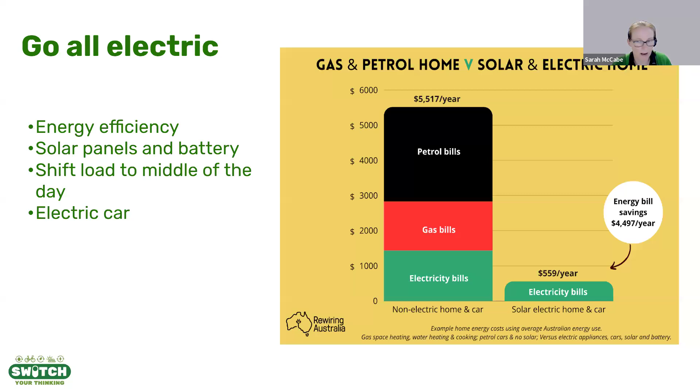Going all electric - Rewiring Australia is a fantastic organisation that has crunched the numbers on how much going all electric will save people and what that means for our carbon emissions. You can see on that slide it's a huge difference, achieved by making 6 key decisions: solar, a battery, heat pump hot water, induction cooktops, and electric vehicles, along with making your house as energy efficient as possible. Rewiring Australia is a great website to look at if you'd like to find out more.

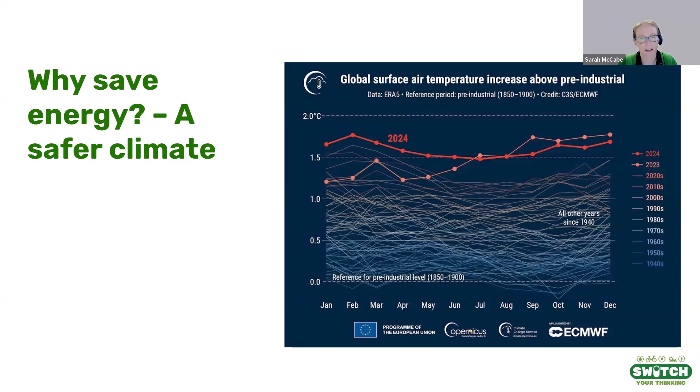And finally, the other reason for looking at energy efficiency is a safer climate. This graph shows how global average temperature has been rising for some time. We've had a big jump in the last couple of years, which shows how urgently we need to continue to act on this and do everything we can.

So that brings me to something very important to know when you're looking at making your house more energy efficient: how is energy measured?

I think we'll start with a watt - everyone knows a watt because it's on your light bulb box. You can see my little light bulb there, it's a 4-watt light bulb. A watt is how much power your appliance is using at any moment in time, and kilo means 1,000, so a kilowatt is 1,000 watts. You can compare my 4-watt light bulb with my electric oil-filled column heater - that's the nameplate on it, and you can see it uses up to 2,400 watts, or 2.4 kilowatts.

A kilowatt hour is how much energy your appliance is using over time. So if your heater is drawing 2.4 kilowatts for 1 hour, it will have used 2.4 kilowatt hours. If it was drawing 2.4 kilowatts for half an hour, it will have used 1.2 kilowatt hours. A kilowatt hour is the unit in your power bill.

These two things are confused all the time, but they measure quite different things, and it's important for you to know as we go through the presentation, because I'll be talking about those two things a bit. So, the first step to addressing your energy efficiency is to get out your power bill.

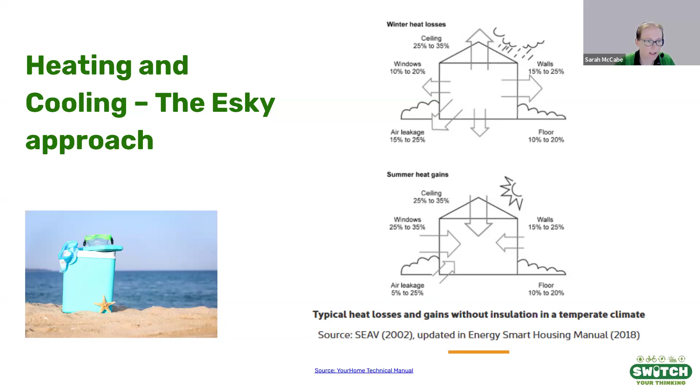So the big one is your ceiling, and that's why people talk about roof insulation so much. If you don't have ceiling insulation, I recommend you get it. The minimum at the moment depends a bit on what climate zone you're in and a few other things, but it's around 4.1. The R value is basically a measure of how insulating the insulation is, and that's the minimum for new builds now. If you do have insulation already, you might want to check it's okay.

A really great safe way of checking is to use your thermal camera, which is in your energy audit kit. There are lots of stories, particularly in recently built houses, where builders haven't installed insulation like they're legally required to, or the batts have just been thrown up there still in their packets, or more commonly, it's just been installed very badly. Or the insulation has been there a long time and it's thinned, or a tradie has shifted it and not put it back. There's all sorts of stuff that might mean your insulation isn't working properly, and those are the things you'll pick up quickly with a thermal camera.

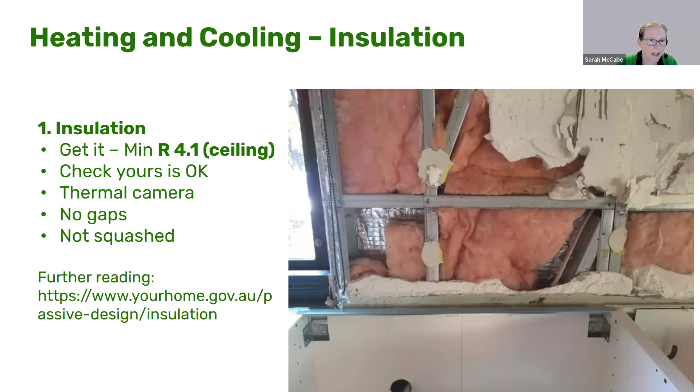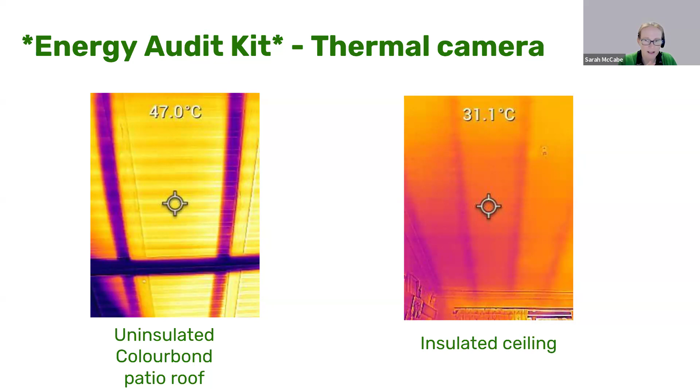In terms of my insulated ceiling, that looks pretty good, better than my walls at least. I can't see any gaps or anything like that. Normally if there was an issue, it'd look all kind of chunky.

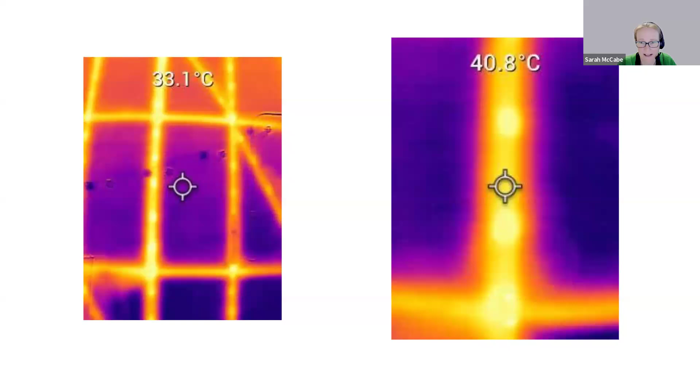All right, so the next thing was the windows. You all kind of intuitively know the hot windows in your house, they're usually on the east or west side, and those are the ones you really need to work on. The best thing is if you can stop the sun hitting your windows in the first place with shading, which might look something like this.

There's shutters and there's all sorts of things that you can use. Basically, you just need to stop that light hitting the window.

We inherited this very large roll of good quality block-out shade cloth, and when I saw the price new, I was like, okay, green shade cloth is fine.

But you can also use like a vine or plant a tree. That would probably do a good job, even better, and look much prettier. A deciduous vine is another good option because it allows the warmth in winter as well.

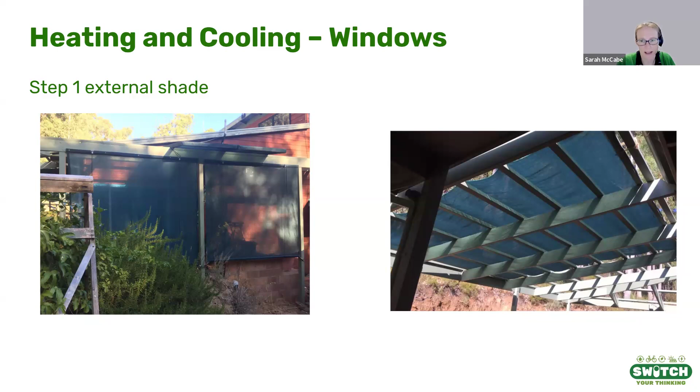And then once you've stopped the heat hitting the window, the next thing you can do is insulate the windows even further with thick rubber-backed curtains, or with a pelmet or honeycomb blinds. I'll show you - unfortunately my stock photos couldn't find me any nice pictures of curtains with pelmets, but...

If you don't like the idea of a visible pelmet, I've also heard about invisible pelmets, which is basically like a bit of corflute that sits across the top of your curtain rail and stops the heat getting up that way. Some people use dowels or even rolled up towels to stop the heat getting in. There's quite a few options there.

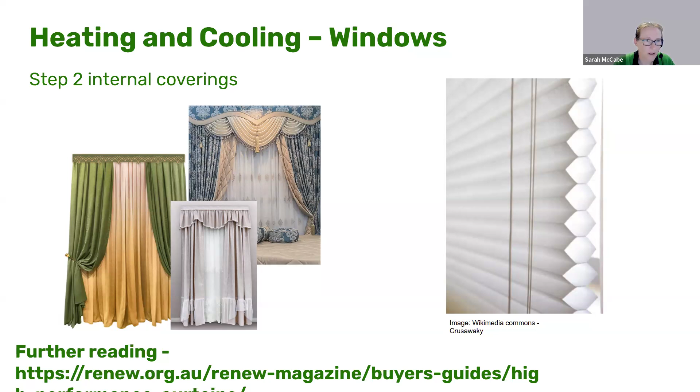All right, so gaps and air gaps. This one's pretty self-explanatory - you kind of just find the holes in your house and you block them up.

It's especially things like old chimneys, gaps from shrinkage or your house settling, gaps around windows, check if all your door seals are still good, that sort of thing.

Sealing your home will be okay for most houses because they're just very leaky to start with in Australia. But we also need to be aware of ventilating our home adequately to avoid condensation and also indoor air pollution issues, especially if you have gas appliances, because gas appliances give off a lot of indoor air pollutants.

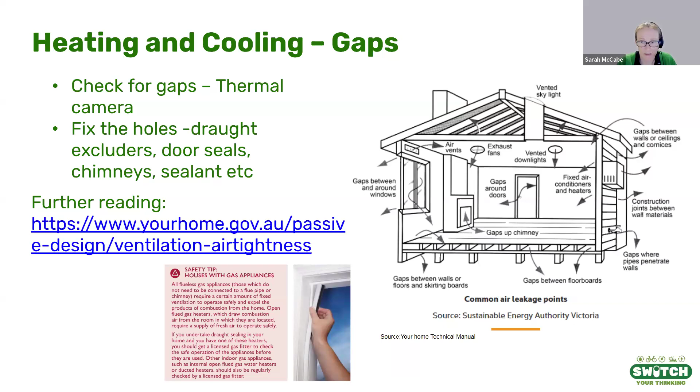Okay, so imagine your house is now nice and insulated, kind of like an esky. You can see why it's going to take a lot less energy to heat and cool, but you still want to choose the most efficient heating and cooling system as possible.

Look, fans are great, we all know about fans, but the next best option after that is a split system aircon, or reverse cycle aircon as it's also called. It's also often the cheapest way to heat your home, even cheaper than gas heaters, and it doesn't have all those harmful air pollutants associated with it as well.

So lots of people have a split system for cooling, and then they've also got a gas heater for heating. So one of the cheapest things for them to do is just use the split system for heating instead.

And the reason why they're so efficient is because they're powered by this really super efficient heat pump technology. So basically, for every 1 kilowatt of energy that goes in, you can get 3 to 4 kilowatts of heat or cool out using the magic of refrigerants.

Now, as an aside, something that confused me, and so I'm passing on to you so you also know: the amount of heat or cool put out by an aircon is also measured in kilowatts.

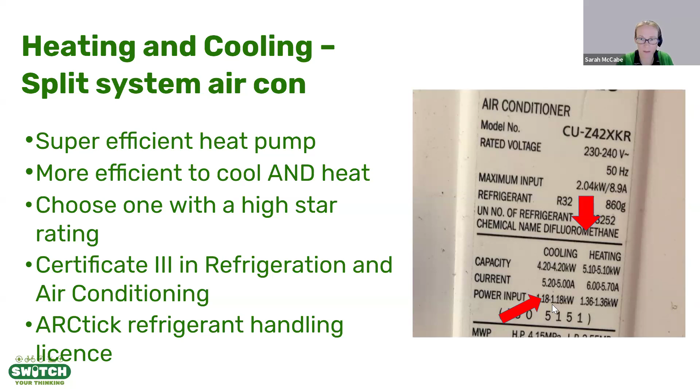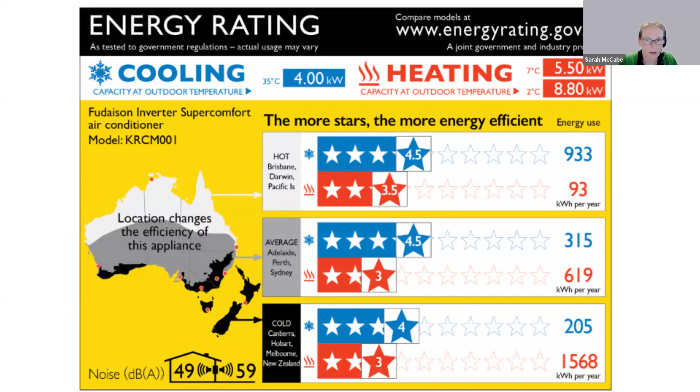Even within split systems, some are more energy efficient than others, which is why you look at the Energy Star rating. The Energy Star rating sticker is a bit different for aircons compared to other appliances, because heat pumps perform differently in different climates. So the energy rating label gives you a different star rating based on which climate you're in. Just choose the one with the highest stars that you can afford.

To get them working even better, make sure your air conditioner is set between the recommended ranges in winter and summer, because every degree makes quite a huge difference to your heating and cooling bill. Finally, to keep them running efficiently, clean your filters, because the aircon has to work so much harder to suck air through dirty filters, using a lot more power. If you don't know how to do that, check the manual on your aircon.

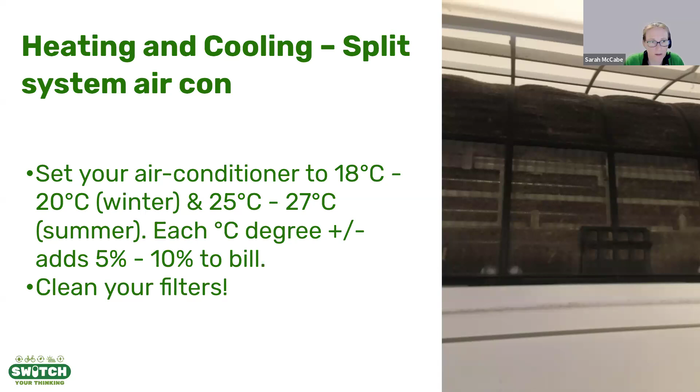All right, so the next biggest area is appliances. They use about a quarter of the energy in an average home.

To find out how much your appliances use, you can also use a calculator - Synergy's got a similar calculator on their website for dishwashers, washing machines and that sort of thing. But again, they're based on lots of assumptions. Why do that when you've got a device in your energy audit kit that lets you measure exactly how much you're using? You can use the PowerMate on all your indoor appliances that have a plug. The big things you might want to check are things that are on a lot of the time, or appliances used to heat or cool - fridges, entertainment equipment, heaters, things like that.

To use the PowerMate, you plug it into the wall and then plug the appliance into it. There are more detailed instructions in the kit, so follow those for step-by-step guidance. But basically, you hold the run button down to clear all the previous data, then press run again, and leave it for a while. Then you can look at the energy in kilowatt hours, how much that's using, the cost, and it'll also show the carbon emissions - you scroll between them by pressing the menu button.

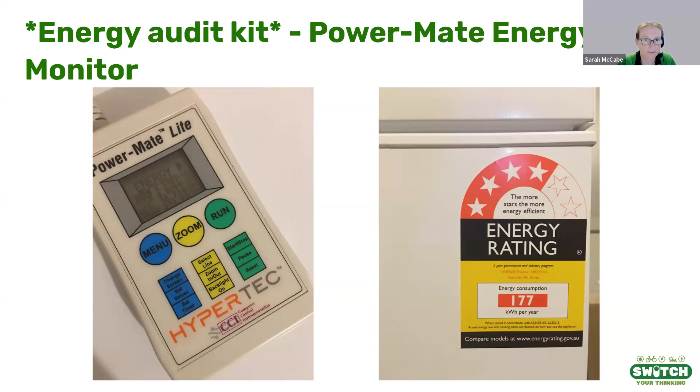So if you want to know how much you would save by upgrading, you can just go into the energy rating calculator. This is a really great website and very easy to use. You could just pop in there and select a potential model that you might compare your energy use to, then have a look at that compared to the figure on your PowerMate, and see whether whatever you're measuring is performing well or not.

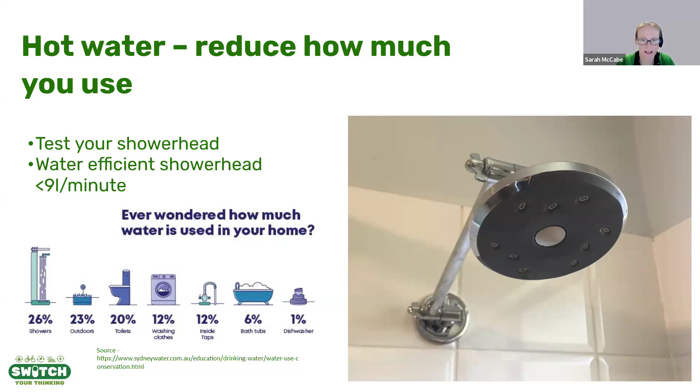The easiest way to test your shower head is with a bucket. You just hold the bucket under the shower head, let the water run on full for 15 seconds, then measure the water and multiply it by 4, and then you have the litres per minute.

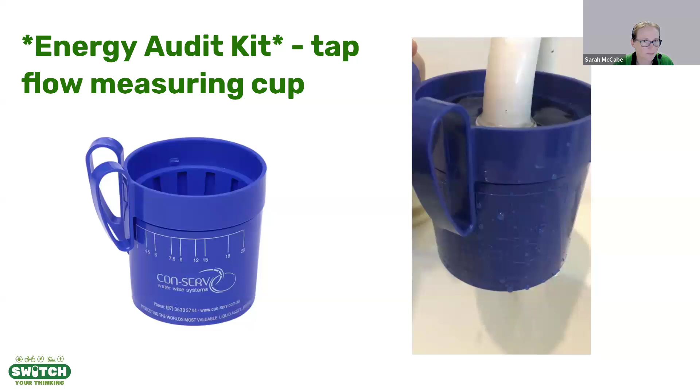When it comes to the hot water system itself, you have a huge opportunity to reduce your energy consumption and costs when your old one dies and you get a new one. Buying a hot water system is going to affect your power bills for probably a decade to come, so you really need to make sure you're ready for that decision, because a lot of people, when their hot water system dies, just go with whatever the plumber tells them because they want a hot shower again.

The general consensus now is that the most efficient option is a heat pump hot water system, and they use very little power, but are more expensive upfront. So once you've done your research and decided whether that's the one for you, it's good to be prepared because it allows you to budget for it.

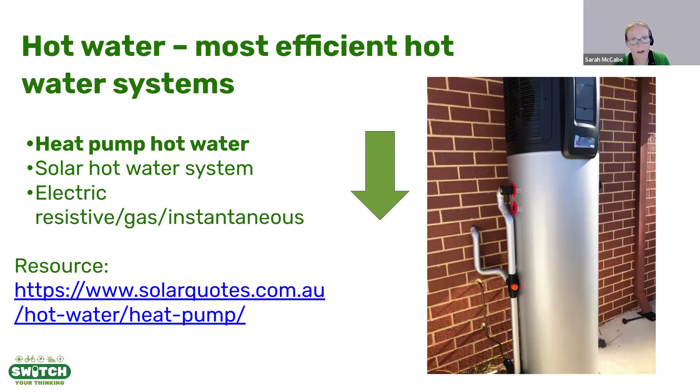That link there is another great one. It's a buyer's guide from a website called Solar Quotes, which gives a lot of information about buying solar, but also about heat pumps, electric vehicles, and all sorts of other things too. It talks about how they work, how much they cost, and the reputable brands out there. That's a good place to start with some research.

It's around about now I'd show you another calculator so you can work out roughly what switching to a heat pump is going to save you, but like I said, I couldn't find one. So instead, I'm going to show you this study done by Renew in 2021, which worked out the savings of going all electric in WA, which is important because our electricity and gas prices are a bit different to other states.

They calculated the savings for a few different scenarios, like big houses and small houses, if you've got lots of gas appliances or just one.

These were the results for replacing a gas hot water system at the end of its life with a heat pump in a medium home. The heat pump was on a timer to come on in the middle of the day to make the most of the solar. I think most come with a timer, but when you do your research, double check that yours does. They found that replacing a gas hot water heater with a heat pump had a payback of 5 years with no solar and 3 years with solar, so the heat pump paid off its additional upfront costs quite quickly.

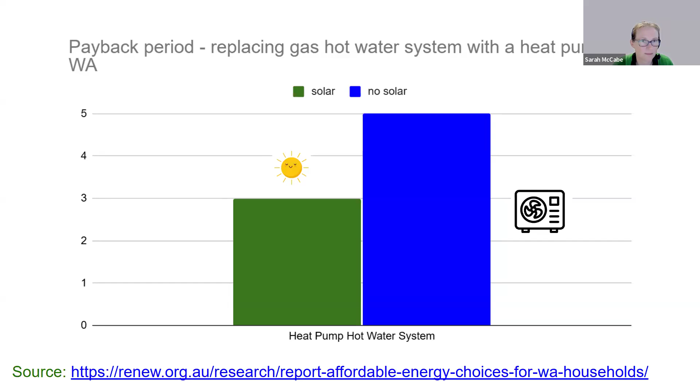These were the total savings over 10 years, so they're pretty good, especially if you've got solar panels. If you're interested in that report, I've got a link to it there. If you're the kind of person that likes to delve into the detail, you can look at all the different scenarios and work out which works best for your situation.

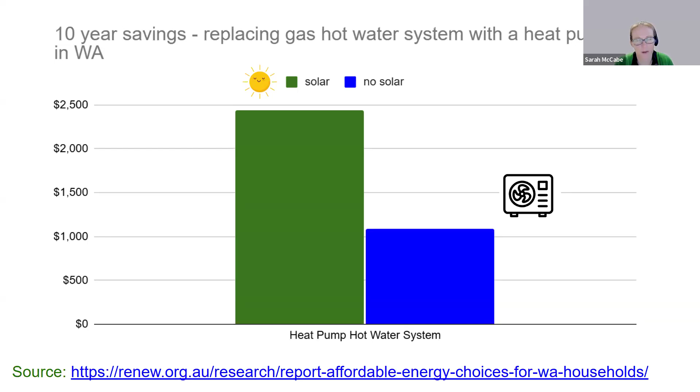Heat pumps use refrigerants, and while they are magic, they can also pose a problem for climate change, because if they escape, they have the potential to warm the planet many more times than carbon dioxide. That's why you need to have fridges regassed and stuff like that.

When you're selecting your heat pump, you may want to consider the global warming potential of the refrigerants. Some of the better and more efficient heat pumps actually use carbon dioxide, which has the lowest global warming potential of the options, followed by things like R290, which is propane, then R32, and then R134A has got quite a high global warming potential, so you might want to avoid that one. Some of these other ones are now starting to be phased out and banned in lots of different places, so it's difficult to get those regassed. Just something to think about.

Another reason why it's good to find that ARCtick accredited installer when you're looking at heating and cooling options.

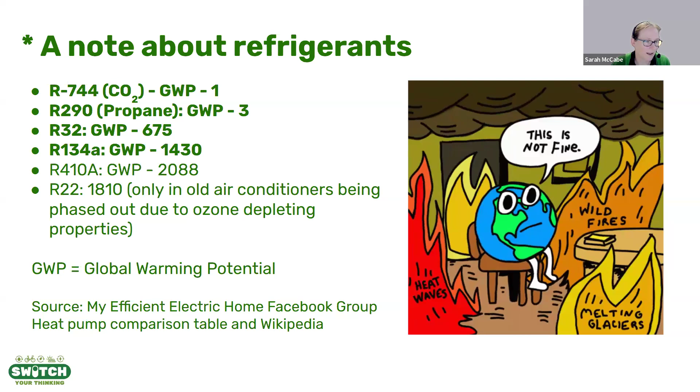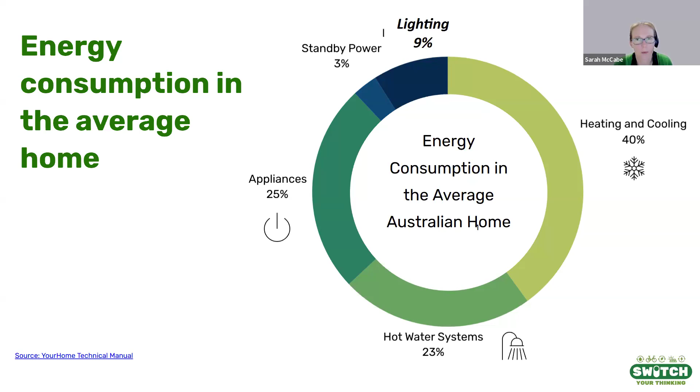Finally, we've got lighting, and lighting seems to be the thing people think about first when it comes to saving energy, like switching off your lights. But as you can see, it's actually a very small proportion of the bill. So if you've got a big bill and all you did was just go around and switch the lights off a bit more, you can see why you probably wouldn't see a big difference in your bill. I'm much more likely to be the mum telling off my kids for having the aircon on when they're not in the room than for leaving the lights on.

Luckily, lighting is pretty easy. LED lighting is the most efficient and it's got the longest life of the lighting types. It uses significantly less energy than an incandescent light, which you can't even get anymore. You're probably going to be replacing compact fluorescent lights now, and in this table you can see LEDs are a bit more efficient than a CFL. Because these lights are more mainstream now, that's probably why lighting is a relatively small proportion of the average family use.

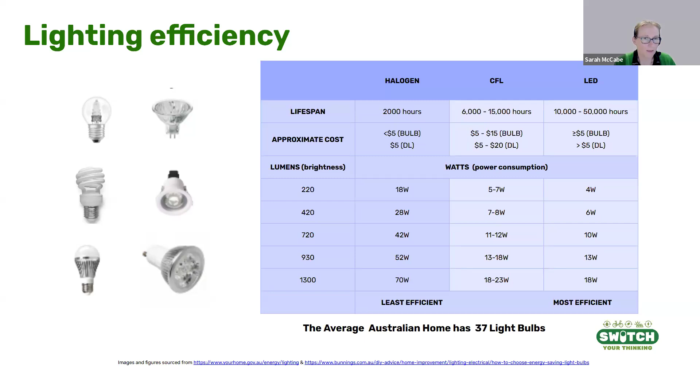Sale of new halogen lighting has now been banned since 2021, so it's going to be harder and harder to get bulbs and things anyway. So replacing halogen lighting might be a big priority.

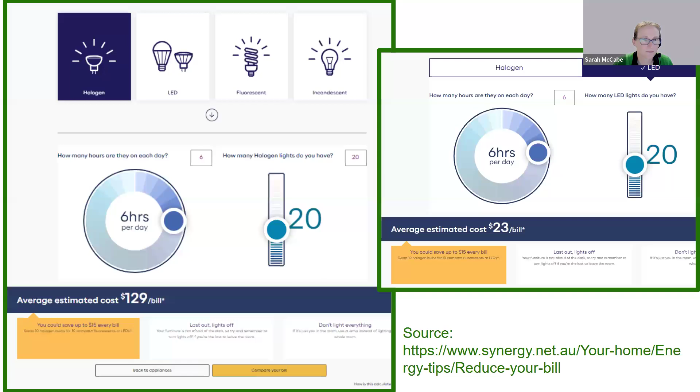So they're the major energy users in an average house, and some of the big stuff, things you can do to get noticeable cuts in your power bill. But sometimes you might have big power bills because something is going wrong, and that's when you can investigate using your interval data, which you can get from the My Account website if you have a smart meter. You'd have a smart meter if you'd had one installed as part of Western Power's program to install them across Perth, or if you installed solar panels, you would probably get one.

You would get one then. You can also request one, and it costs about $100 to get one put in. And it's got some really useful data with it.

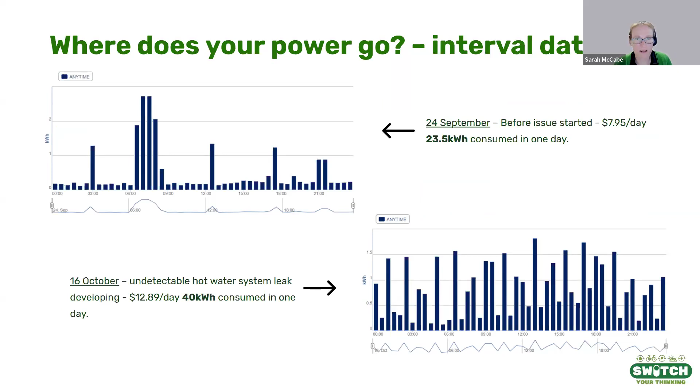Over the coming weeks, it gets worse and worse until eventually they've gone from 20 kilowatt hours a day, which is $8 a day, up to $31 a day in power use. So by the time you get your bill, if you haven't noticed that leak, it's going to be a very nasty shock. That's a really good way to keep an eye on your energy use and try to work out what's going on if you've got a big bill.

The interval data is only useful to you if you log in and have a look at it, but there are also other energy monitors which will show you data more easily on a display or in an app.

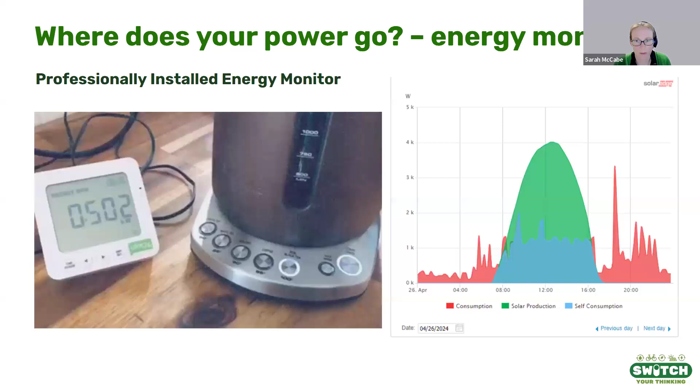Another type is this consumption and production monitoring, which you can ask to have put on when you get solar panels. I really like this because it lets you see your solar overlaid over your consumption, and therefore lets you see how much spare solar you've got and the things you need to do to shift your power to use up your extra solar.

If you need to get down into an even finer grain, that's where the PowerMate is a really good option in your energy audit kit. There are also ones you can buy as well, and even little smart plugs that you can plug things into, which will show you your power use on an app and clever things like that.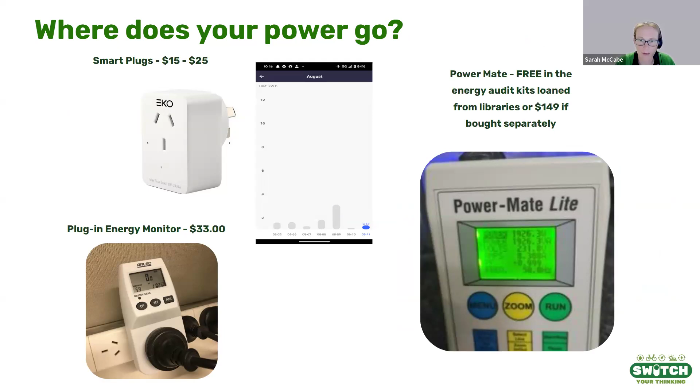If you've looked at all of those things and you're still stuck on why you've got high bills, it might be time to call in an expert. A home energy efficiency audit is done when a professional comes to your house. They assess where your energy is going and give you personalized recommendations. That's another good one.

The other thing is a NatHERS assessment if you're building a house. That's an assessment on the thermal performance of your house plans. It's a really good thing to do right at the start to make sure you're not going to get stuck with a giant heater in your wall, like me with my steel frame.

For more information, there's a really great Facebook page called My Efficient Electric Home, where people have asked all of the home energy efficiency questions there basically is to ask. You can go in there and search. I'd suggest trying to find a WA specific one, because sometimes the stuff from over east, they've got a different energy market and all sorts of stuff, so it's not quite as relevant here. Try and find WA specific posts that relate to your question, and you should be able to find them because there are so many posts on there.

The guy who started it wrote a book called My Efficient Electric Home Handbook. That's a really good book to read as well, which talks about the process of going all electric. There's also the Your Home Technical Manual, which I've shown you pictures from today, and that's all available online, so there's a link to that in your resource sheet. Another great book to read is The Big Switch, by the guy who started Rewiring Australia, which gives some of the bigger picture about going all electric as well.